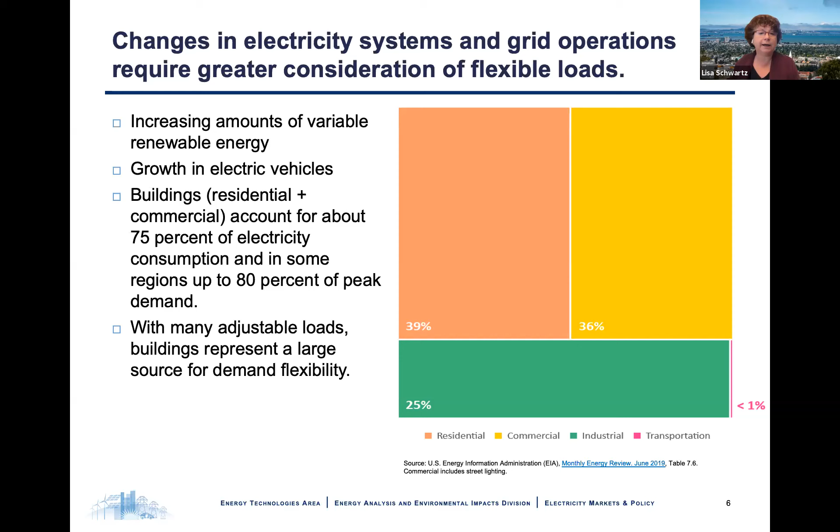So what do we mean when we say grid interactive efficient building? It's an energy efficient building that uses smart technologies and distributed energy resources to provide demand flexibility. The building co-optimizes for 3 things. 1, energy cost. 2, grid services. And 3, occupant needs and preferences, and all in a continuous and integrated way.

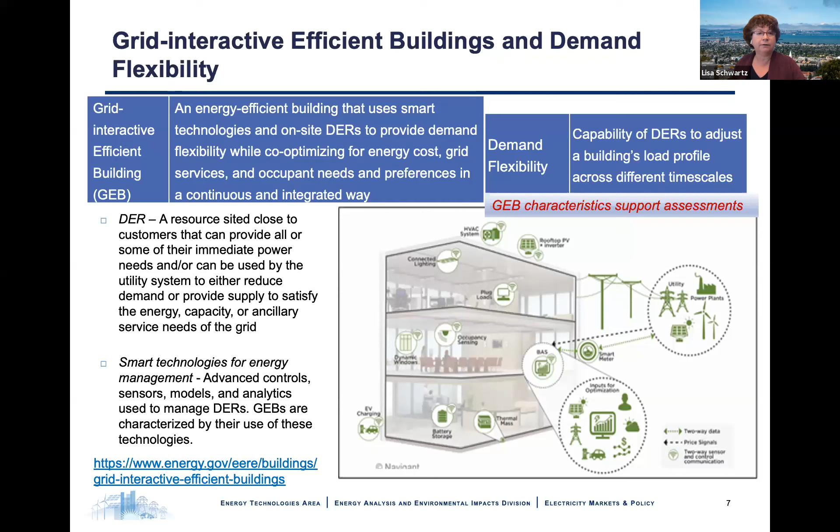And when we say demand flexibility, we're talking about the capability of the distributed resources to adjust a building's load profile across different timescales. You can read more about these technologies at the link at the bottom of the slide, and the slides are posted on our website, so you can take a look at the links following the webinar. Next slide, please. Slide 8.

We also refer to 5 demand-side strategies to manage building loads. First is energy efficiency, which is the ongoing reduction in energy use, while at the same time providing the same or maybe even improved level of building function. And then there are 4 strategies that we can harness to provide demand flexibility in buildings.

Load shed is the ability to reduce electricity use for a short period of time, typically on short notice. So we're talking about during peak demand periods and also during utility system emergencies. So for example, calling voluntarily for citizens to reduce energy use in California recently during the period of high peak demand.

Load shift, that's the ability to change the timing of electricity use. And that may change the amount of electricity that's consumed. For example, shifting may result in using more electricity when it costs less, and reducing demand during peak periods when electricity costs are higher, particularly if you can harness battery storage.

Modulate is something that we expect to see more in the future, and that means balancing power supply and demand, or reactive power draw and supply autonomously. And by that we mean within seconds or even within sub-seconds in response to a signal from the utility or, say, a regional grid operator. For example, through modulation, a building could provide ancillary services like regulation reserves or frequency response.

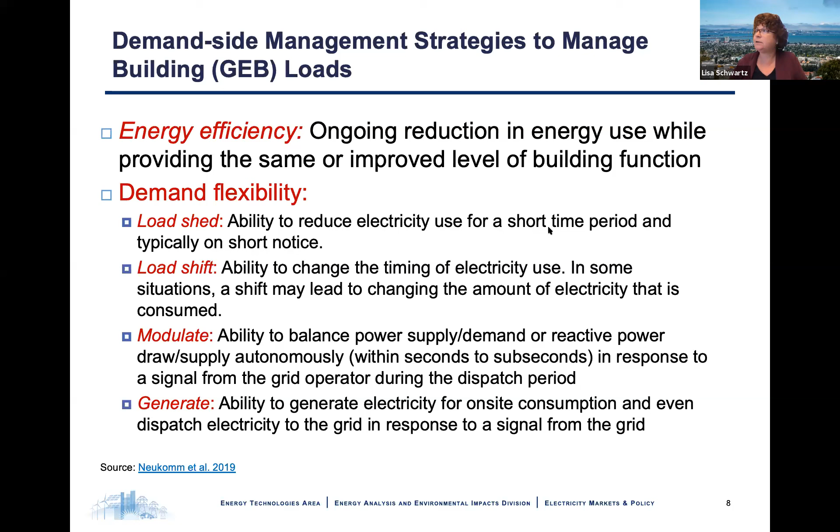So the point of grid interactive efficient buildings is that these strategies work in concert to improve the load curve that the electricity system needs to serve. So here's a stylized example. The graph on the left shows that energy efficiency alone pushes down the load curve. And in the middle chart, if you add on-site generation like solar, overall use of energy from the grid is reduced, but the building's peak load on the grid may coincide with utility system peaks. The chart on the right shows that if we add load shedding and shifting, we can flatten the building load profile and provide the greatest potential support to the grid.

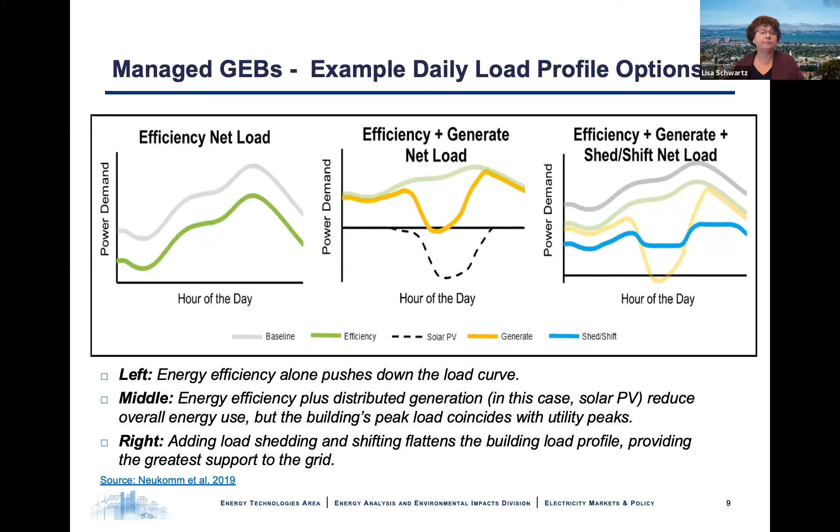Next slide, please. So our new report is focused on how you know what you actually achieve through demand flexibility in buildings. So first, we explain some basic concepts and considerations for assessing actual demand flexibility performance of buildings. And that's whether it's in the context of participating in demand flexibility programs or time-varying retail rates. We also provide information on designing assessments for demand flexibility, and we talk about challenges and opportunities as demand flexibility becomes more common and more sophisticated.

We intend the report to be a resource for state and local governments, and also utilities, regional transmission operators and independent system operators, energy service providers, designers of building systems, building owners and operators, and also researchers that are developing and testing new assessment protocols. I really want to acknowledge our colleague, Sean Murphy, who helped with research for the report.

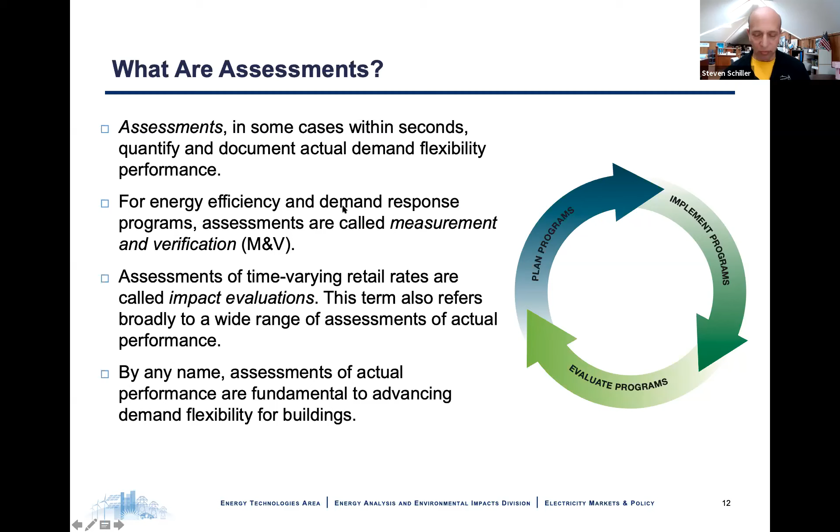So why do we do this? So, let's get to the right slide here. You can assess me on how well I flip my slides. I think that'll be my big test today.

So in terms of why we do this in the context of actual demand flexibility, well, as will be discussed, performance assessments of demand flexibility involve determining the timing, the location, the quantity and quality of grid services provided. Such assessments are used, of course, for financial settlements, but as illustrated in this figure, they also have other important applications. I'll just mention a couple. They provide confirmation that buildings can reliably, cost-effectively, and consistently provide demand flexibility. This is really critical for the acceptance of demand flexibility as a grid resource.

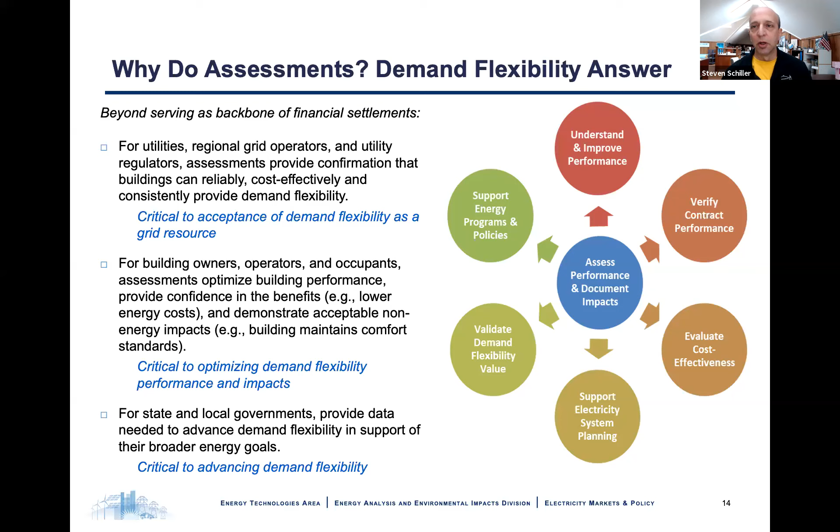Thus, while we can and do find opportunities to improve performance assessments of demand-related services, to a large degree, current best practices, including the use of advanced M&V or M&V 2.0, are really sufficient for basic service offerings. However, advances in assessment practices will be required in the future as these grid-interactive efficient buildings, as Lisa described, start providing more continuously, more demand flexibility using more DERs, doing more load shifting, more shedding, modulating, storing, generating, maybe even using EVs.

And as this demand flexibility becomes more continuous and more sophisticated, we'll need to step up our assessment practices also. So I'll be talking about these as we continue, but a couple areas for upgrades are developing new baselines or counterfactual constructs, deploying more advanced metering and analytics, developing cybersecurity, further developing privacy and improving communications interoperability. And the last, if we're going to do more modulation, stepping up how we do modulation assessments.

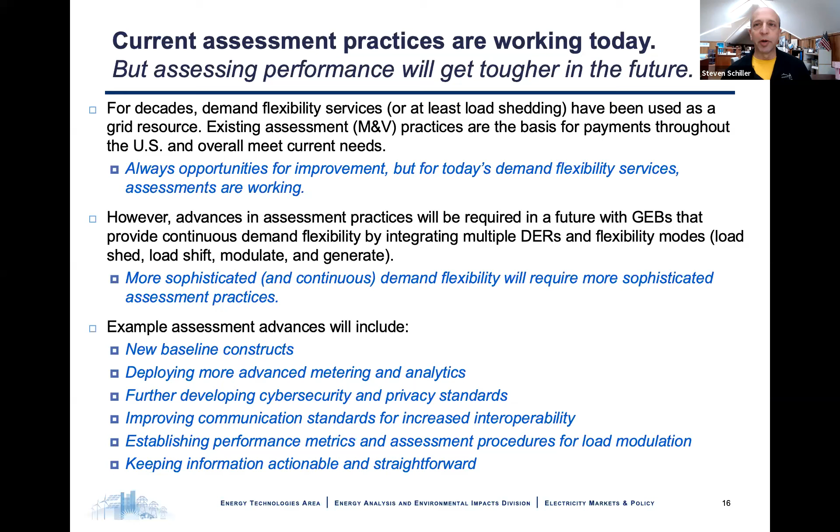So I want to just quickly run through a typical day in the future of demand flexibility, to give you a sense about where assessment practices might be. So in this scenario with lots of words here, let me just say, there's a building, it's participating in an aggregator's day-ahead capacity market program. They receive a request on Tuesday morning to modify building operations for the next day.

In a manner that provides a specific electricity load profile. The requested load profile would take the form of specified hourly consumption levels based on electrical grid capacity needs and the historic consumption performance of that building.

Now it's Wednesday, and using the results of prior actions and machine learning software, the building operation systems use real-time meter data to control a generator, charge or discharge a battery, adjust the demand of the building's electricity systems like ventilation or cooling, and at the same time maintain the building's performance within predefined parameters for comfort and productivity.

During this demand event on Wednesday, the building automation system also uses its energy management information systems and OpenADR standards to communicate the performance data to the building operator and the aggregator. And then, as well, the overall information is provided.

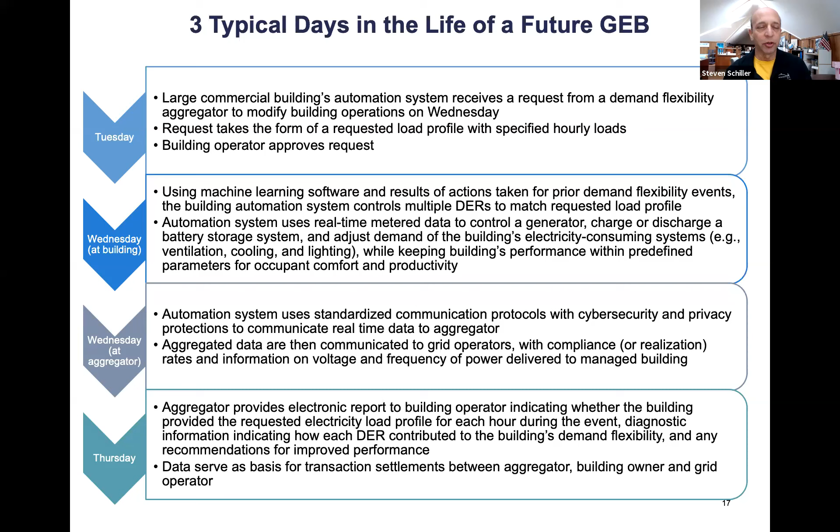This data also serves as a basis for any settlements, and this pattern is then repeated. So what we see is a future where there's much more integration, much more communication, and a lot more automation. So what would be the considerations for doing this? So the next phase after we got through these basics.

So in the report, we talk about 5 fundamental considerations to define an assessment. The big deal here is metrics. Metrics are numbers or other forms of information describing the process of interest. They indicate how a process is performing, and then metrics become a basis for making improvements to a process.

But let me start actually at the top here. First, objectives. What information is the assessment intended to provide, and how will that information be used? Bottom line, you can't know what you want if you don't know what you're going to use it for. The objective is obviously very important.

Next up is the boundary. Relatively simple thing, but it's important for deciding: are you looking at the whole building, or perhaps one individual building or system, or one DER, or one flexibility mode? And of course, you might also encompass many buildings in your boundary.

And then, as I mentioned before, metrics are the big item, deciding what metrics will be assessed and how they'll be defined. This then defines what data will be acquired and what granularity, subseconds to hours, for the data measurement frequency. And so there'll be more on metrics coming up here.

Next, once you know your objectives and your boundary and your metrics, you decide the analysis methods that are going to be used. How you're going to be calculating your expectations for certainty. Will baselines be used? If so, how will they be defined?

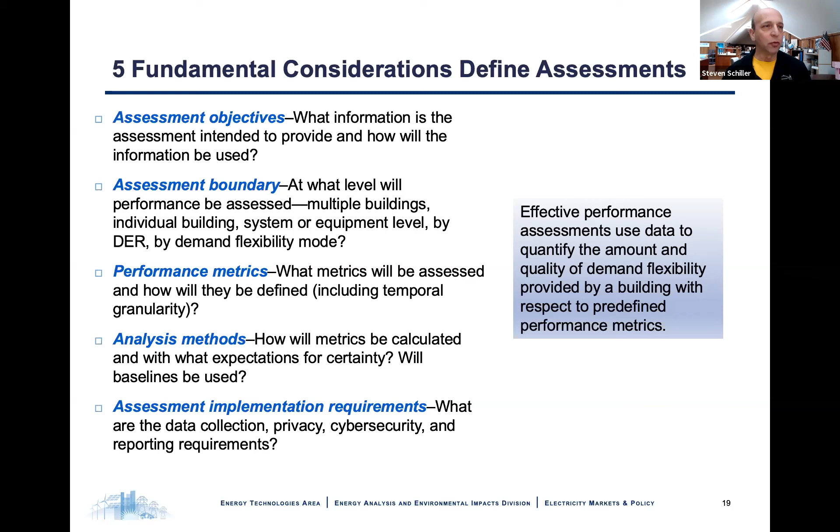And then finally, what are the actual implementation requirements, such as data collection, privacy, cybersecurity, reporting, timing of reporting, and then who's going to actually do this assessment? These all constitute what we do here.

Now, getting into a little more of this, I'll just talk about the objectives here. It's a starting point. I'm not going to read through all these lines here, but let me just give you a couple examples. Let's say first for building owners and operators, the objectives might be to stay within a certain level of demand during a billing period to avoid triggering a demand ratchet.

For state and local governments, your objectives might be about confirming whether programs or policies are actually working, have their goals been met, and having specific metrics tied to numerical targets. For utilities or grid operators or DER aggregators, the objective can be to determine the compensation for buildings participating in the programs.

And of course, electricity system planners, including RTOs as well as state energy offices, can use the building performance data to inform forecasting and modeling for upgrades or the use of demand flexibility. And of course, there's even the designers of buildings that can use this information.

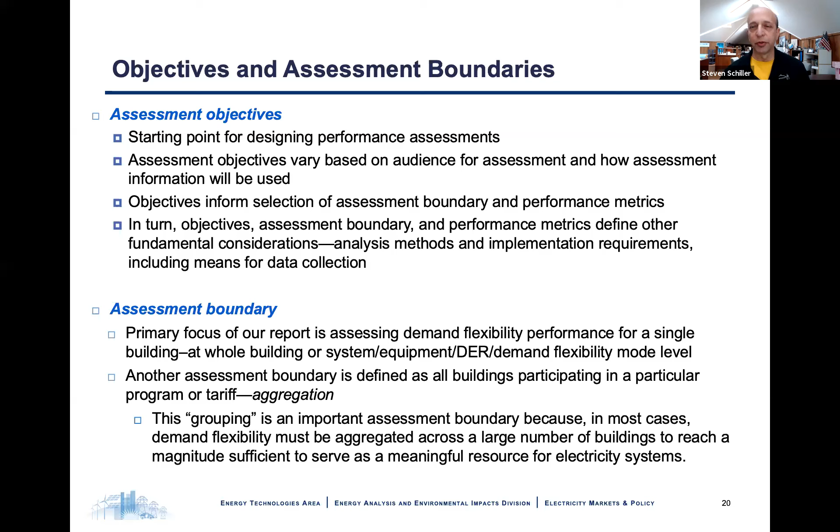So I was talking about metrics, saying that's really the critical one here, so let me talk a little bit about those. As I mentioned, the real key to assessments is picking your metrics. And a reminder of what metrics are is in the little text box here. So in this report, we define 4 categories of metrics, and these are what I call the big one, which is the quantity and timing of demand flexibility provided.

Some examples might be the amount of demand reduction during defined time periods in kilowatts or kilowatt hours, or really the change in kW or the kWh is the most common metric that we see for demand flexibility. Second category, quality of demand flexibility provided, such as how quickly the building responds or ramps up its change in demand or the persistence of the impacts.

Then next one up, I'm not going to go into too much, but we can discuss during the Q&A if people are interested, is around attribution of impacts, whether it's to the overall program or specific pieces of equipment, the DERs or the flexibility mode. What is it that got you the flexibility that you did receive? And then the fourth category is impacts on building owners and occupants, such as energy cost savings, or was the health and comfort productivity maintained in the building?

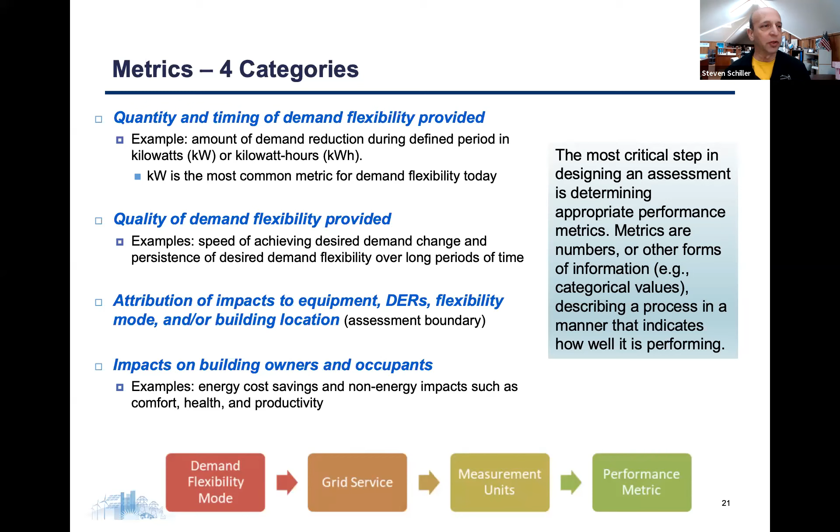So going beyond some of these metrics of performance, let me just mention that, for example, a state agency that we interviewed for this project said that real information of interest to them was verification of the participants' ability to take the demand flexibility action. Assessments can do that in that if a building has performed, it's an indication of potential to perform in the future. Can they provide that grid service?

Also, another area beyond just the actual performance ones: talking with system operators, they emphasize the importance of predictability of load. As one individual put it, grid operators don't serve savings, they serve load. Thus, grid operators need to understand whether loads participating in demand flexibility programs and time varying retail rates will meet the expected load profiles with respect to magnitude as well as the shape.

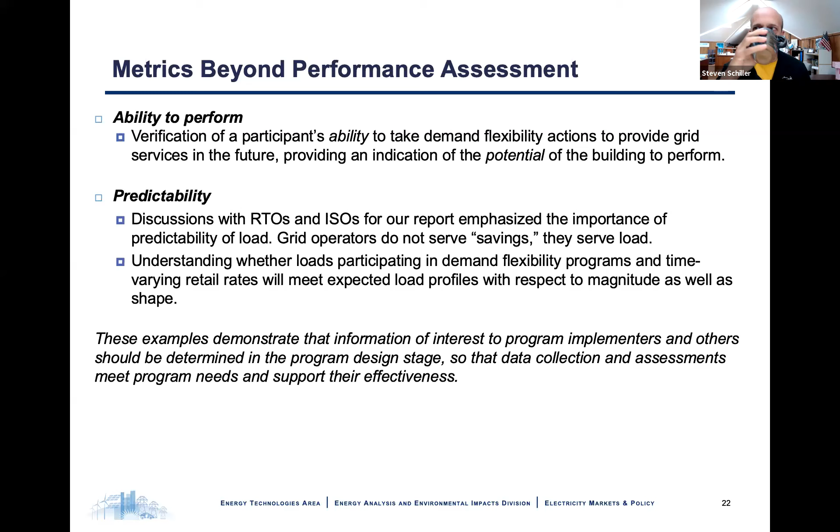These examples illustrate that the importance of demand flexibility information to both program implementers and others determines the design of these programs and needs to be taken into consideration as you put together your assessments as well as your programs. So once we get past the objectives, the boundary and the metrics, you've got to figure out how we're going to do this. What analysis methods are there going to be? So in the report, we talk about two categories.

Direct measurement methods are one, basically involving direct measurement of a performance metric, thus not requiring a counterfactual or a baseline. For example, in real time, directly measuring energy output of a generator or the amount of charging or discharging of a storage system, or really even just confirming the simple shutting off of an electric water heater in response to a frequency support request.

Next comes the trickier method though, and that's the baseline methods. Methods which require definition of a counterfactual. And there's two subcategories of that: measurement and verification, M&V, and control group methods. As a quick reminder, the counterfactual scenarios are defined in a manner that represents historical load patterns. So what the load would have been at the subject building or buildings without the applied demand flexibility modes.

Common example, a building's power draw during a weekday event from 2 to 4 p.m. can be compared with a typical power draw measured for that building during recent non-event weekdays from 2 p.m. to 4 p.m. That would be your baseline. So M&V methods involve measuring, say, kW for a building and comparing that to a counterfactual scenario. These are typically used for dispatchable demand response programs.

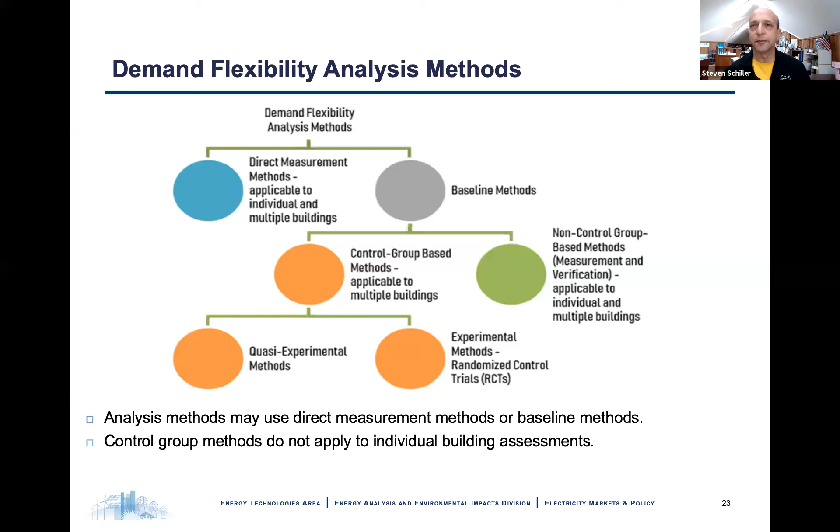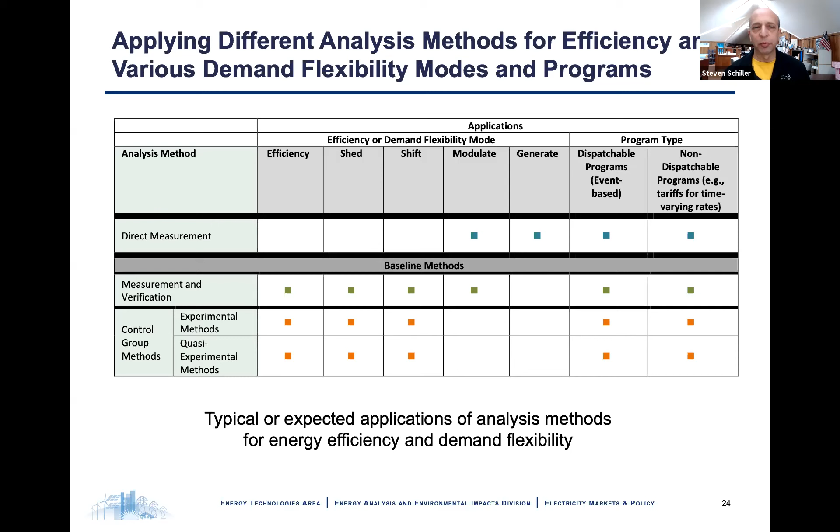Oops. So I'm not going to go too much into this table here. It's in the report, but the basic point is that the application of the analysis methods does vary by demand flexibility mode and the services provided and the type of program or tariff. Again, this table is in the report.

So before we leave analysis, though, I just want to talk a little bit more about that baseline thing. You know, under current practices, any net changes in demand or energy use resulting from efficiency or load shed, load shift cannot be directly measured.

For example, the true impacts of demand shedding are the difference between the building's electrical demand during an event and the demand the building would have otherwise required if the building operator did not participate in the load shedding program or was not served, say, by a time varying tariff. In practice, we can never directly observe how much demand the building would have used had it not been in the program, because at any given time, a building must either be in the program or not.

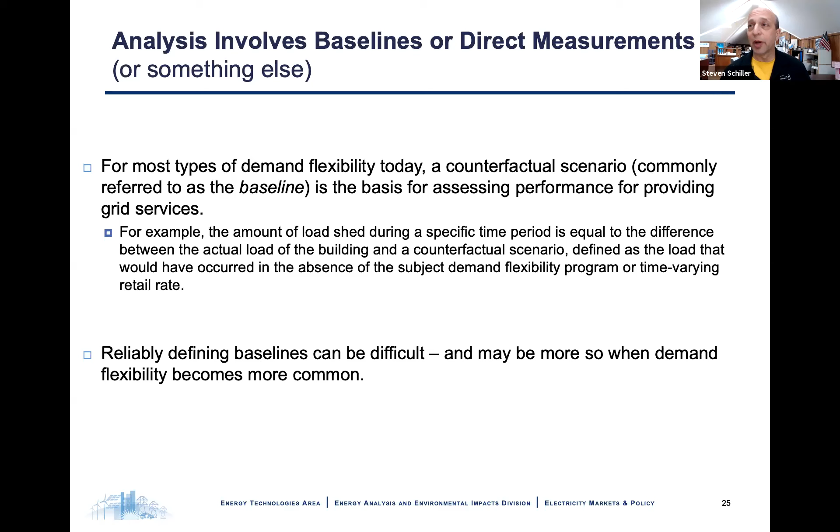So as mentioned in summary earlier, today with how demand flexibility is practiced, in general, baseline approaches are working just fine. But in the future, reliably defining baselines can be more difficult as demand flexibility becomes more common. In particular, when demand flexibility events are so common, it becomes really hard to find non-event days or times to use as a baseline. Fortunately, there are some options now and in the future, and we'll talk a little bit about that quickly here, because I don't want to leave you too worried about that issue.

For some demand flexibility modes and grid services, performance metrics may simply be based on direct measurements, such as the amount of electricity provided to the grid from on-site generation. Another possibility, for the shed and shift mechanisms, might be that we look at load shapes. The concept of load shape being that the desired load shape is met along with the magnitude of the demand flexibility event.

There's also that we might just end up moving more towards the non-dispatchable price-driven regimes. And for those, baseline is determined not by the building, but by a control group, and we're not as concerned about individual building performance, just overall performance. And there, again, there might be some other options that just don't rely on a baseline at all. Maybe just comparing against a load factor, that is an average to peak load ratio over some extended period of time. So baselines may become more of an issue, but we're working on solutions for that if it does become an issue.

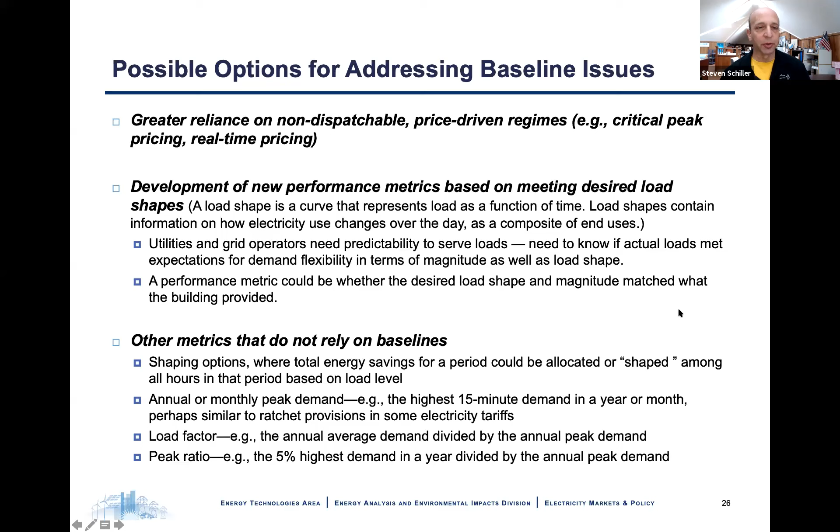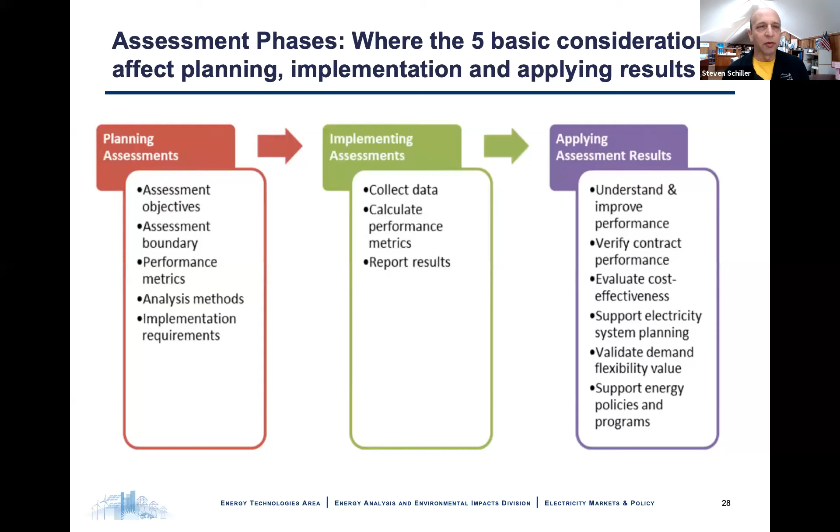So before leaving this topic of the 5 basic considerations, this slide tries to sum up this assessment process by identifying 3 phases: the planning, the implementing, and the applying. Planning involves the 5 considerations as discussed, but let me actually talk a little bit about that 3rd phase. We don't want these reports to just sit on some proverbial shelf. Of course, they would be used for settlements, confirming contractual performance and payments in an incentive program, but they also should be used for feedback and planning, getting back to those objectives of this assessment process. If we know the information is going to be used beyond the assessments, then a structure needs to be set up so that the right information gets to the right people at the right time so they can use it and take full advantage of this performance data that's coming out of this process.

So with that bit of background, let's talk about another area that the report gets into, which is, what are the development needs? So the fundamentals of assessing demand reductions from efficiency, load shed, and generation, as I said, have been in place for decades, are well established, and can serve really as the basis for load shifting and modulation assessments as they're developed. Overall, things are sufficient for what's in place today. But as I alluded to, in order to meet the full potential of these GEBs to integrate multiple DERs and flexibility modes, the assessment approaches will need to advance, to be modified, or new approaches created. And we can build on the existing practices, such as those that already exist within the M&V protocols, and those, for example, found in the New England and PJM RTO manuals and California ISO's demand response guidance.

For example, demand flexibility might become more continuous or near continuous. Load modulation might be more common, occurring within subseconds to seconds. And then increased use of combinations of different DERs, perhaps even including the use of EV charging. And all while trying to reduce the complexity for the consumers and the market participants, so it's as simple as possible.

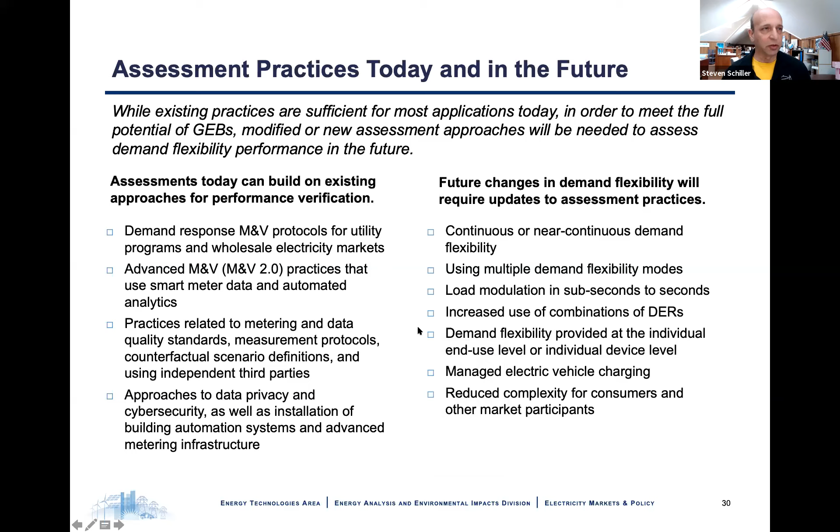And of course, an increased number of events, as I keep alluding to, making it harder to just come up with a baseline. So development need number one, as we get more advanced, baselines. Next up, the second category is just basics of assessment practices, how assessments are done. These challenges might be related to sorting out the contribution, the performance of individual building systems or pieces of equipment or individual demand flexibility modes, versus today, where we generally just look at the overall building performance. Having the sub-information can become really critical for improving performance.

And certainly, there's more data. We're going to see more data and the ability to manage that data quickly, and that's going to put more pressure on cybersecurity, privacy, and interoperability. And then the last area is modulation. Today it's a less used demand flexibility mode, but if we get more and more into that, we're going to see a need for defining metrics specifically associated with that modulation mode.

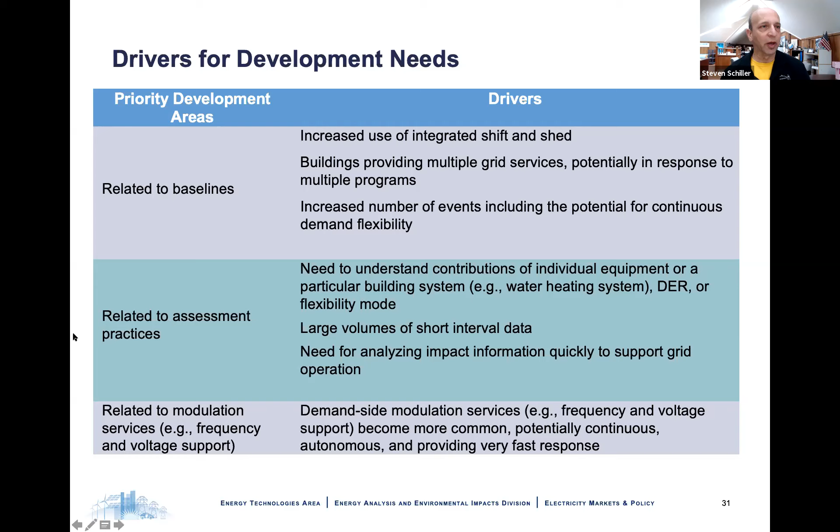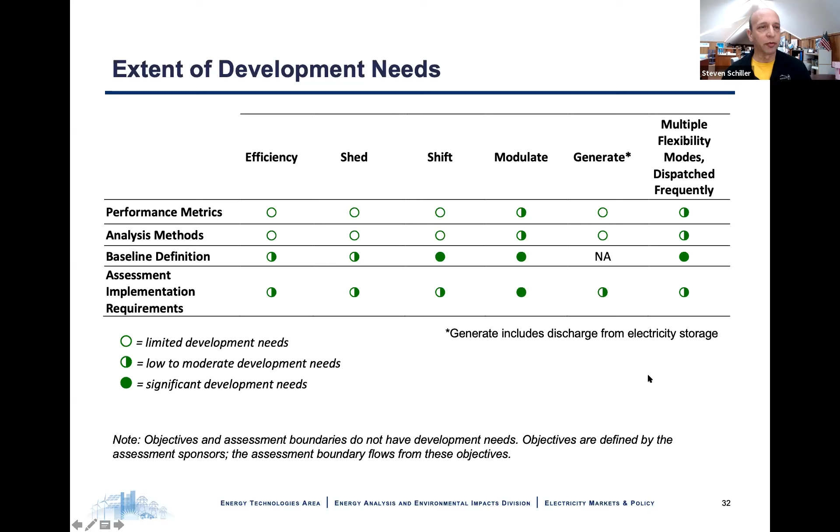Here's another slide I'm not going to go too much into, but again, this table is in the report. What this table is trying to show in a nutshell is that virtually all aspects of demand flexibility assessments offer opportunities for improvement for determining the impacts. But the needs do vary. If I could summarize, with respect to efficiency and the demand flexibility modes of generate and shed, assessments are in pretty good shape. Maybe a little less so for the shift mode, and certainly less so for modulation. But when we start looking at multiple flexibility modes dispatched frequently, that's when the development needs become more critical going forward. So let's talk about planning for the future then with this background.

So like a lot of things in life, it's about balancing the needs, the costs, the benefits. How good is going to be good enough, and what I think of as the fundamental question of life, as compared to what? So here's a summary list of some takeaways. When developing demand flexibility projects, don't forget about the assessment needs. That is, how are you going to assess results and judge success? Next, take into account the 5 considerations that we talked about here and in the report, assessment objectives, etc.

And lastly, while today's practices can suffice for today's demand flexibility options, if we get to more sophisticated demand flexibility options, or we're planning to utilize modulation or demand flexibility on a regular basis, new strategies, such as new baseline constructs and implementation support, are likely to be needed.

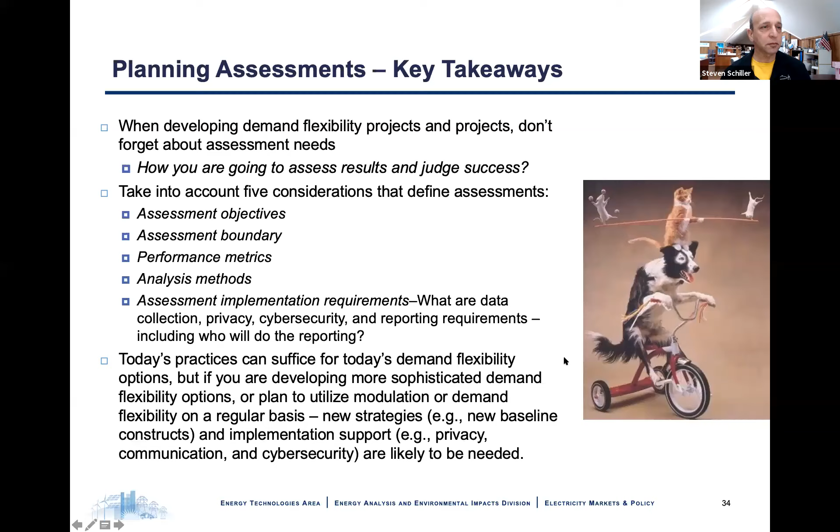And in each of these roles, they can always find ways to support assessment, from just encouraging them, that is, lead by example in your own buildings and programs, to encouraging or even requiring the capabilities and systems to not only do demand flexibility, but also have the capability to assess them, including working on metering, interoperability, security and privacy infrastructures within your jurisdictions.

So let's talk about some of these areas here. So, here's a list over the next 2 slides here. They're somewhat in order of priority and ease of implementation, some combination of those. And the first is really just about leading by example.

You have your own buildings, you'll have not only demand flexibility operating within your buildings, but also the ability to actually assess those, and provide technical assistance to building owners and operators, whether public or private. And then when you have this information from your buildings, disseminate that information. Use that to show not only how to do assessments, but also how demand flexibility is operating. Hopefully it's a positive report, and that encourages more demand flexibility.

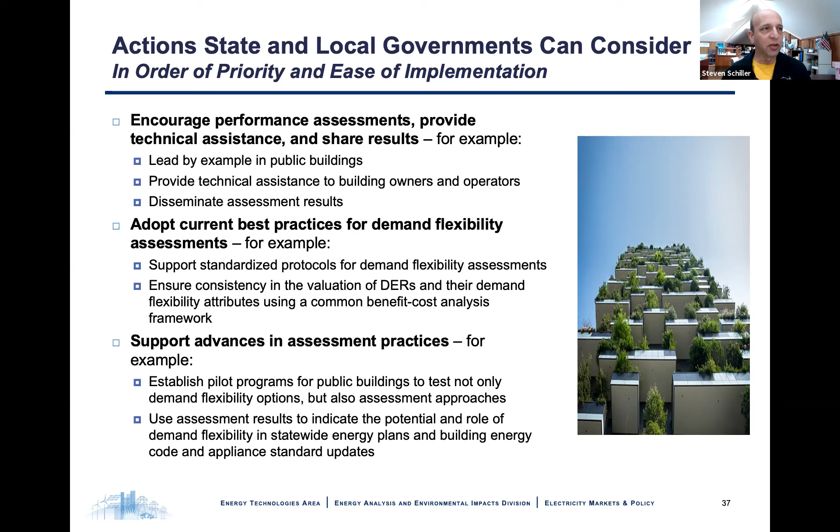Another area that's really critical that we find is having access to data. And this is information from the billing meters that's either found or not found through advanced metering infrastructures, but adopting within your jurisdictions data access provisions and agreements and regulations, all with, of course, respect for cybersecurity, privacy, and consideration of the interoperability, that is the ability of different systems to be able to communicate with each other.

And in the case of demand flexibility, the importance of being able to communicate straight from the building to the grid, and perhaps even individual pieces of equipment or systems within the building to the grid, so that the operators can see that, but also have information for diagnostics for improvement.

Following up on that is encouraging your own infrastructure improvements, encouraging demand flexible ready equipment through codes and standards. Many states have their own individual appliance and equipment standards. Some of those are looking at making new equipment that goes in demand flexibility ready, having the communication systems, for example, and including that in standards.

And then lastly here, governments can play a really helpful, if not critical, role in coordination across programs and markets. You have the resources to encourage, if not mandate, coordination among the utilities and the other market actors to actually see results. And then support providing the market assessments that can inform the development of those.

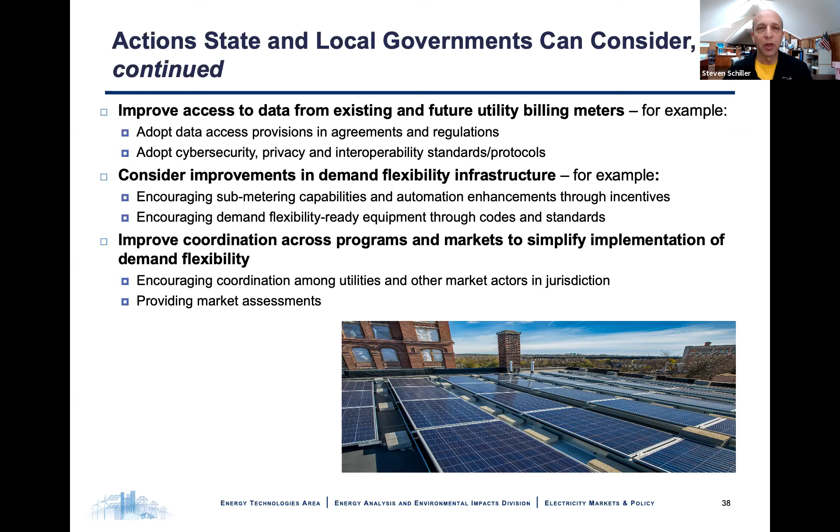So with that, that is the presentation. I've got a summary slide here. I've been going through most of this, so I think I'll maybe just, with 20 minutes left, leave this up on the screen.

I'll leave it to you to decide whether that's me or not at an early age doing my first measurement activity,

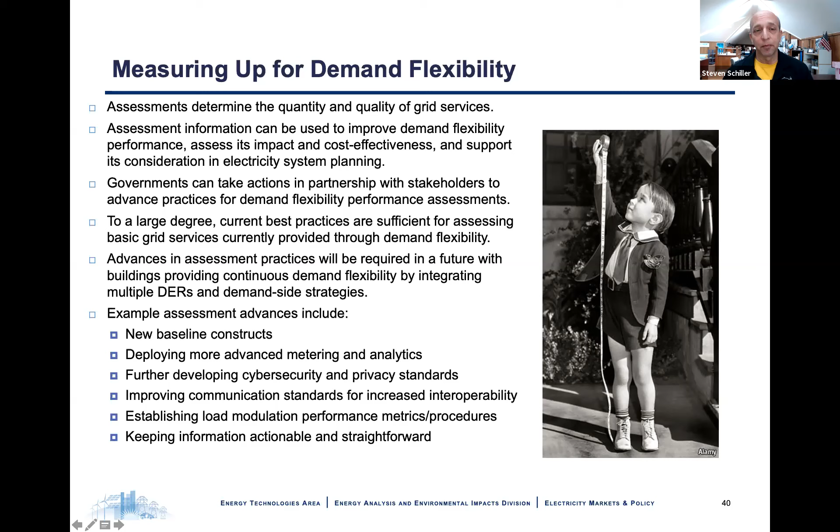It's really when we look at a change, and it's the change as compared to what would have happened in the absence of that signal, whether it's a signal from an aggregator to shut down load or shift load, or it's this price signal that says, hey, it's gone really expensive, change your use. So it's comparing that with what would have been that becomes the complexity, that we can't just use direct measurements. And that's been the difficult thing of efficiency evaluation forever. And it really fits back within the fundamentals of any investment, that you're comparing what would occur if you do something different.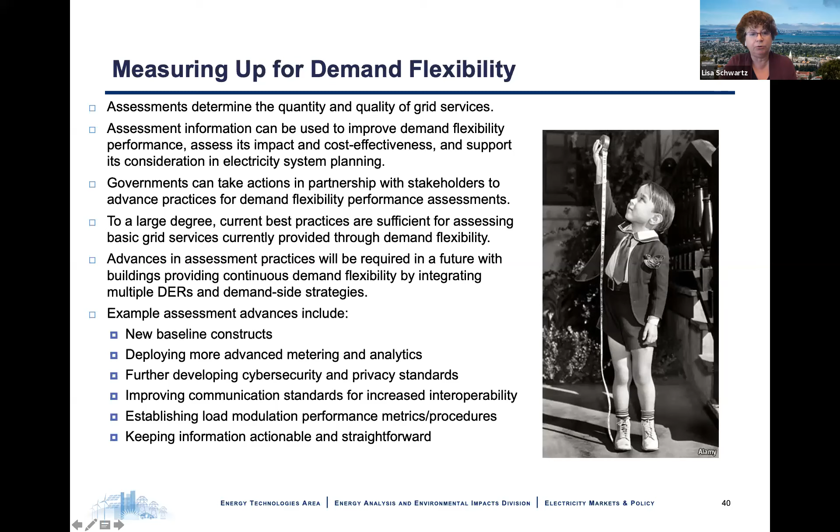So let's move on to some other questions, Steve, because we have like 6 minutes left, and let's see if we can rapid fire get to some of these other ones. First of all, I do want to remind people that the second report in the series covered valuing: how do we value these grid interactive efficient building demand flexibility resources. That's a report led by Tom Eckman, and you can get the link in the slides, also on DOE's website for grid interactive efficient buildings.

I want to just talk about something that was in the news. You know, the recent California blackouts, they were partially eased with energy efficiency and demand response. And so how can assessment support demand flexibility as a resource to reduce both the potential and the impacts of blackouts?

Well, thank you. Let me start by saying that demand side resources, including efficiency and demand flexibility, can be an important tool for grid operators for avoiding brownouts or blackouts. And they can be really cost effective and zero carbon impact tools. Again, it's as compared to what. We have these difficulties I've been talking about with doing assessment. Some of it's very straightforward. Some of it might be more complex, but it's as compared to what? What are your options? If your option is a blackout, putting a little extra effort into assessment doesn't seem like that big a deal.

So with respect to the assessments, for these operators and utilities to utilize these resources, they have to have confidence that when they're called upon, they're going to respond. And that's where assessments come in. It's the same issue really with supply side resources or storage. You need to be able to count on them, and you use historic performance to give you that confidence. So that record of demand flexibility as documented by assessments can provide that confidence. So if they want to count on it, they're going to need to have these, quote unquote, resources for rolling blackouts.